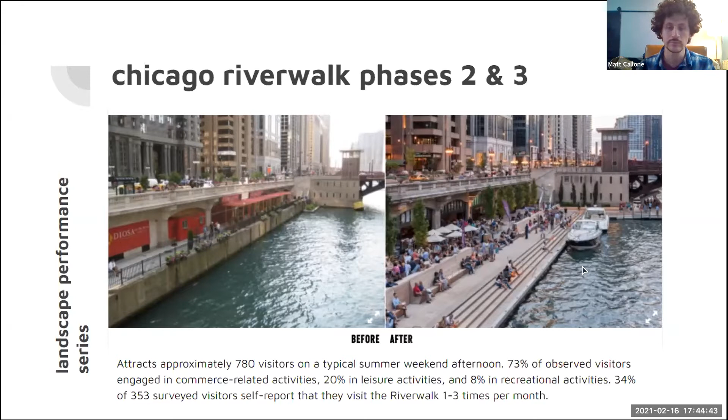Hi, everyone. Thanks, Sarah, for the introduction to our work with the Landscape Performance Series. I was really excited to engage in these projects. It was my first time really researching the benefits of landscapes, and why I think both Sarah and I are here to do this kind of work.

I'm going to talk about these three projects first in relation to flooding, because flooding is a common concern in all of these projects.

In order to speak to these benefits, I'd like you to imagine a 100-year rain event in Chicago. This is like 3 to 4 inches of rain over a 24-hour period of time—lots of flooding, buses and cars having trouble getting through. Each of our projects—the Chicago Riverwalk, the Botanic Garden Nature Play Gardens, and the Argyle Shared Street—can accommodate this type of storm condition to a certain extent.

There are two strategies in managing stormwater represented in our sites. The first, found at the Nature Play Gardens, the Botanic Gardens, and Argyle Shared Street, is an active strategy that considers how water infiltrates a site, how water is detained on site, and how it is either drained off site or toward a detention zone. I'll also speak to a passive approach found at the Chicago Riverwalk that considers the longevity, resilience, and durability of materials for a project that can last, because of its ability to withstand extreme weather events.

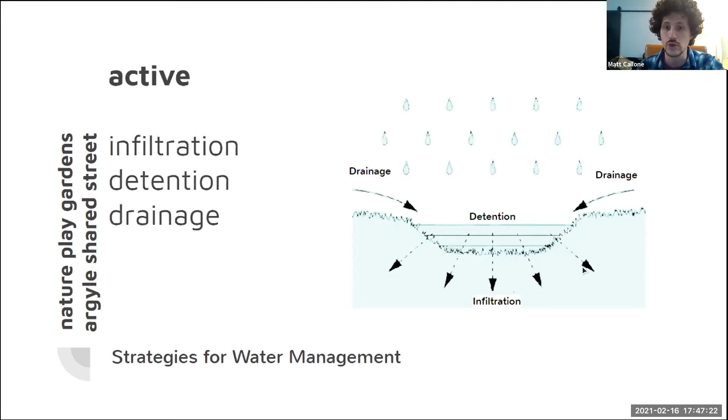Active water management, briefly, is where water is guided and contained to regulate where water pools and where it drains on site. It's a simple idea—we'll see it flowing downhill, detaining on site, and then slowly percolating through the soil, depending on the soil conditions. All of the soil conditions are good in our sites.

Within this active management strategy, we think about it in terms of land management and drainage management. We observe measurable benefits for flood protection and stormwater management at the Botanic Garden Nature Play Gardens through water detention by land management—how land is constructed to hold water—and at Argyle Shared Street through detention via drainage management, where water is guided where we need it to go.

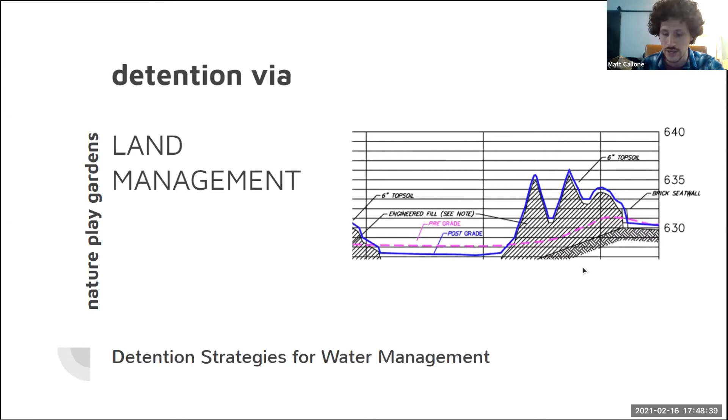Land management is a highly engineered solution for detaining water. These were the drawings from some of the engineering partners that worked on this project, showing how much work goes into cutting and filling the land. But this exercise can yield fun ways of playing with the landscape, as we found in those hills in the Nature Play Gardens, pictured in the distance.

The Nature Play Gardens, as part of the Garden campus, exemplify detention via land management by detaining water through the gradings of highs and lows in the hill shown in the back, and also through rain gardens on the peripheral edges of the frame.

We're also thinking about flood zones and best management practices to manage water. The Nature Play Gardens is situated next to the Chicago Botanic Gardens lake, shown on the left, and this drains to the Skokie Lagoon and river. You can hike around Skokie Lagoons—I encourage you to do that.

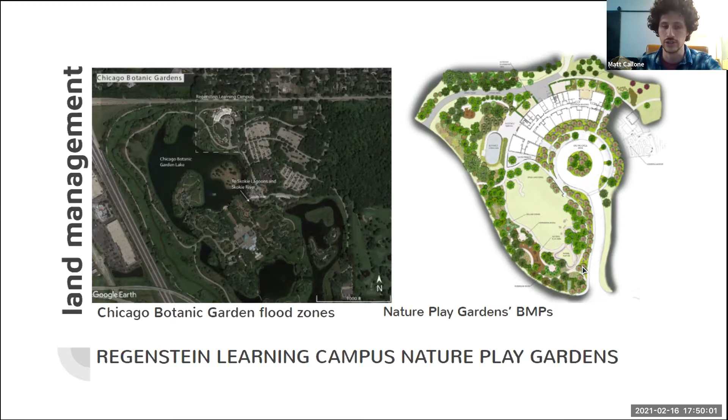These bodies of water contribute to the site's flood zone status, but also serve as drainage regions for the site. The image on the right shows rain gardens, rolling hills, and an open lawn—all designed features that help manage stormwater and serve as preliminary detention infrastructure to slow the release rate of stormwater, the rate at which water re-enters stormwater infrastructure like large pipes.

These big words—compensatory storage—compensate for flood storage that's lost when you regrade a site. With any new construction, you have to figure out how soil is going to be taken away to accommodate for flood storage, and also think about the plants and the soil selected. The reduction in release rate is associated with this practice of compensatory storage, which was a necessary cut-fill requirement on this site, as it's located in a flood zone—you had to increase the flood storage ability by about 50%.

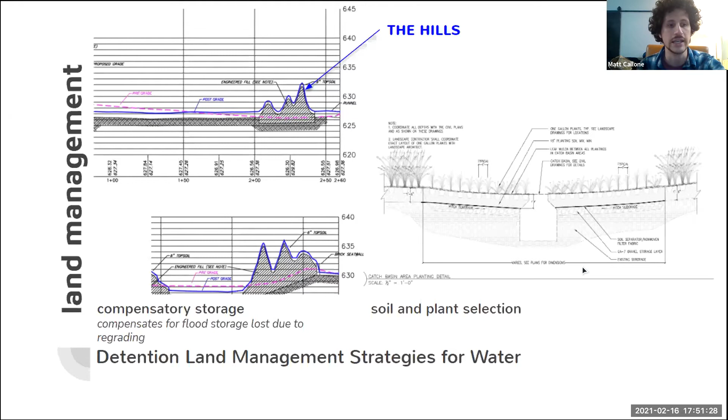Compensatory storage required cutting an amount of flood storage equivalent or greater than the volume of fill added due to the new building located on the site, demonstrated by the pre and post grade elevation markings you can see here. Soil and plants for the site were selected for their ability to infiltrate and be inundated with water.

So in a 10-year flood, increased flood storage is demonstrated by the complete detention of stormwater up to an elevation of 628 feet, and partial detention of stormwater is possible up to an elevation of 631 feet for a 100-year flood event. This reduces the amount of runoff that flows to the Botanic Garden, Lake, and the Skokie River.

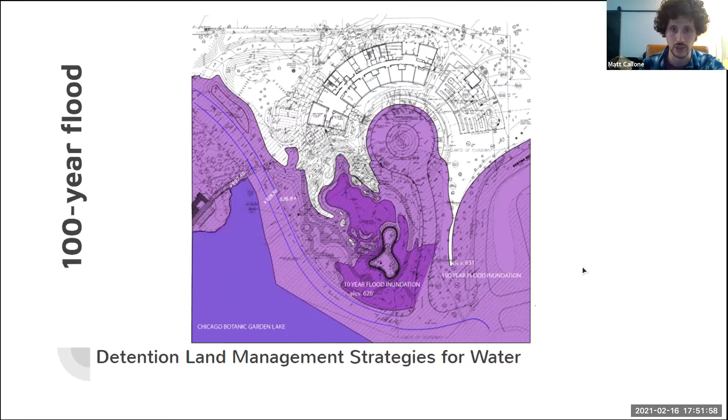This other active management strategy I'm going to talk about is drainage management. So detention via drainage management uses primary and secondary measures. In a situation you may encounter on a daily basis, walking across a path such like this could be permeable.

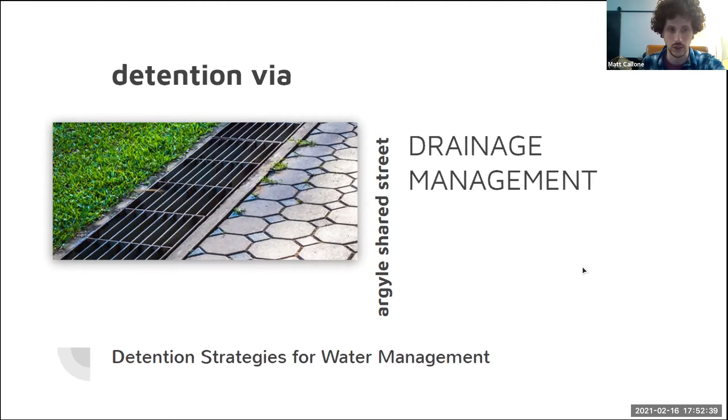You have permeable pavers where the water drains in between the spaces in the pavement into the soil bed layer. And where that system is overwhelmed, you can have a secondary drainage system that drains the rainwater either to another place on site or to the offsite stormwater infrastructure.

So we observed this at the Argyle Shared Street, this drainage management strategy. As Sarah mentioned, it's the first of its kind in the city as a pedestrian-oriented street. But it also exemplifies detention via drainage management by detaining water in areas with subgrades that have high infiltration rates, and it also contributes to the design of the site.

You wouldn't know it necessarily by walking across the street, but the middle area, the actual street where cars drive, that is impermeable with a concrete layer beneath it. And so it's sloped to drain towards the sidewalk, where the sidewalk is permeable. The whole site doesn't have to be permeable in order to manage the water on site.

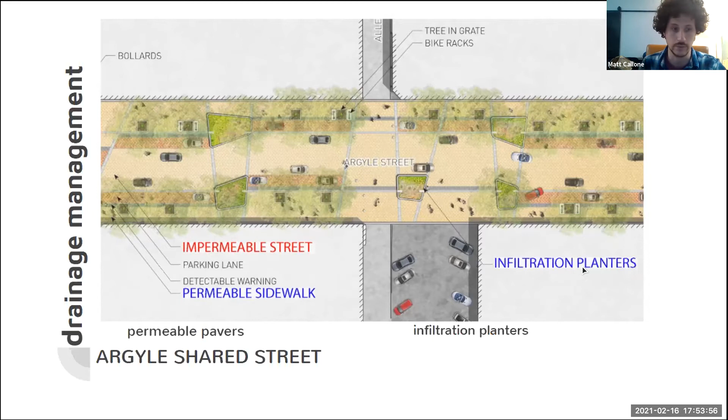So this water drains to a permeable hardscape. It also drains to these rain gardens. And these best management practices made it so that 100% of the rainwater that hits the site can be managed on site, which is really great. This is a really great benefit that we found.

So here are some construction details. A simple permeable paving system was the ideal strategy for the site because the subgrade used was known to have an infiltration rate of 4 inches per hour, significantly exceeding Chicago's minimum requirement of half an inch an hour. It's really close to the lake, very sandy subgrade, easy for water to pass through.

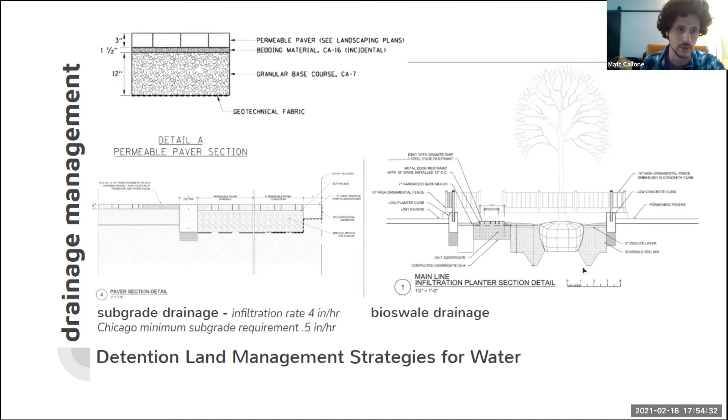And as I mentioned, the impermeable streetscape drains to these infiltration planters and to this permeable space to accommodate that flood condition. Now I'm going to talk about the Chicago Riverwalk, this passive flood management strategy.

This speaks a lot more towards the materials than the benefits we were able to measure. So I just included a picture here - this is not the Riverwalk, just to specify. But traditionally, when dealing with shorelines, be it a riverside or a coast like a lake or ocean coast, the task is to utilize materials that can handle continuous pressure from water hitting it over and over again. This breakwater pictured here is a strategy that's often used.

However, a more innovative approach to flood resistance, the Chicago Riverwalk yields benefits for project longevity in the face of flooding, while also serving as a pedestrian path and a beautiful riverside public space. It doesn't have to look like a piece of infrastructure.

So we noticed flood resilience. The Riverwalk is quick to respond to flooding. The Chicago River generally experiences a 4-foot variation of water elevation during periodic flooding, as marked by the etched pylons shown in these images.

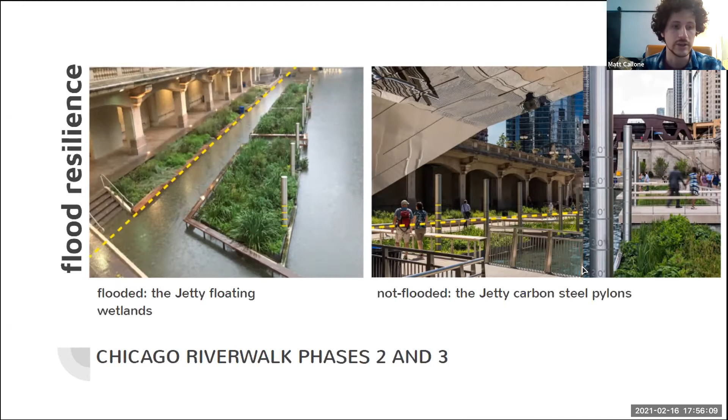It's also a really great way for the public to experience - what are these long, tall metal poles? It's a learning moment for the everyday citizen. And the jetty is also a prime example of this design for resiliency, using submergent and emergent plant species in floating wetlands.

Also, this idea of durability includes teak hardwood used for benches - a waterproof tropical hardwood. Granite pavers instead of a softer limestone protect the Riverwalk vendor locations against damage, and carbon steel pylons mark the water elevations that you saw.

So I'm going to dive a little bit more into the Chicago Riverwalk's additional benefits. Given the amount of time we had to do our research, we didn't find any conclusive benefits in relation to flooding and the cost savings of these materials beyond what we were able to observe and see documented during flood events. However, we did find a host of other environmental, social, and economic benefits that I'll go into.

So our first measurable benefit is an environmental one, and this has to do with vegetation. The introduction of plant species transformed this industrial cargo route into a place for habitat, installing almost 20,000 square feet of flora - fancy word for vegetation - which designates the promenade as the quality of a natural area. That was a really cool benefit. You can see here the plant palette that Jacobs and Ryan Associates selected consists of mostly native species, each with a C value, or coefficient of conservatism, that's designated.

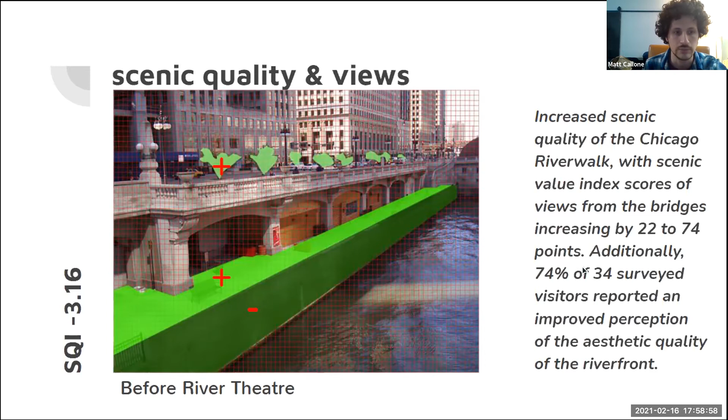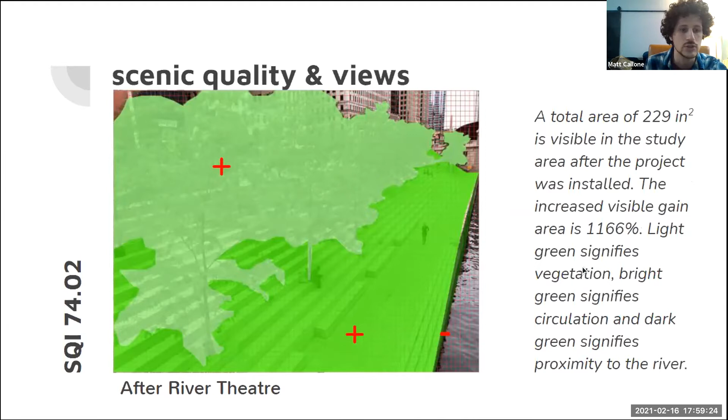After the river theater was constructed, we can observe a significant increase in the scenic quality with the introduction of these honey locust trees in the pale green. That's their shade area, and installed within the terrace promenade. That negative scenic value is also reduced with this promenade by increasing the user's proximity to the river.

This assessment was taken for each of the rooms in our phases. There were 6 rooms in our research. There are more rooms in the entire Chicago Riverwalk, but our Riverwalk that was designed by Sasaki, that's what we were looking at.

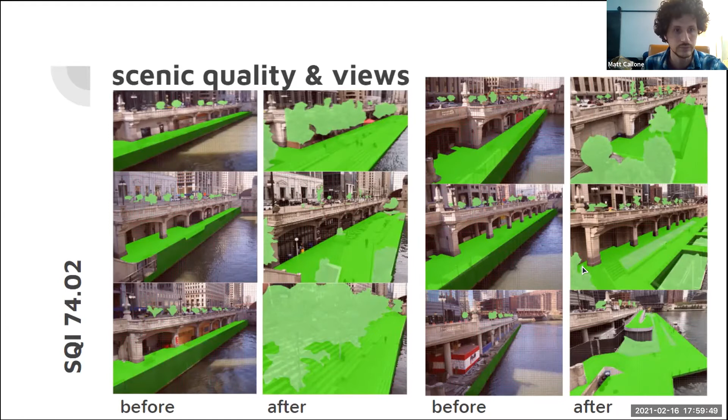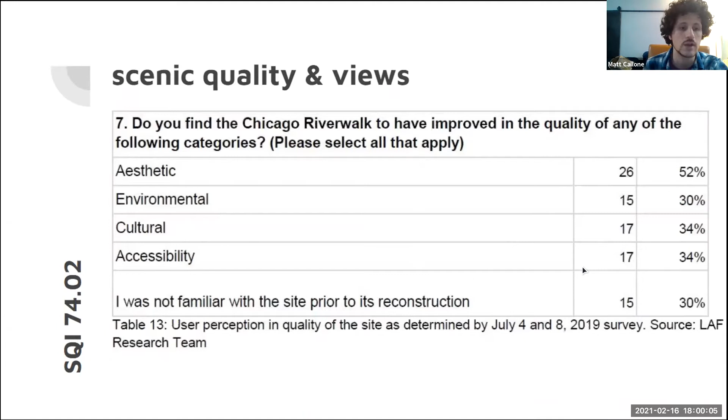So we backed up that scenic quality through assessment of user perception of the space. And the majority of users surveyed observed an improvement in the quality of the Riverwalk, be it aesthetic, environmental, cultural, or in terms of accessibility to the river.

Lastly, the economic benefits. These were really the benefits that tantamount to the success of this project and its acceptance by not only visitors, but by businesses and government stakeholders as well.

Increased visitor spending has generated increased profits. These profits are attributed to the patronization of improved business spaces and the use of the river promenade. The design of these spaces, of course, thanks to the work of Sasaki as well as Ross Barney Architects. So significant are these improvements that the city of Chicago is now able to revisit earlier phases of the Chicago Riverwalk construction in hopes of improving their quality in expectation of similar results of profitability.

So these records of profit reflect the sentiments of business owners. Of the business owners here prior to the reconstruction, an overwhelming majority that responded to our survey were in agreement that this made their businesses more profitable.

And looking at tax revenue, built into these vendor contracts of restaurants, water recreation, like kayaking, boat tours, were fees and taxes that were designated for the repayment of a $99 million federal loan. And the tax revenue gained from vendor profits exceeded expectations for repayment. So we're ahead of the loan.